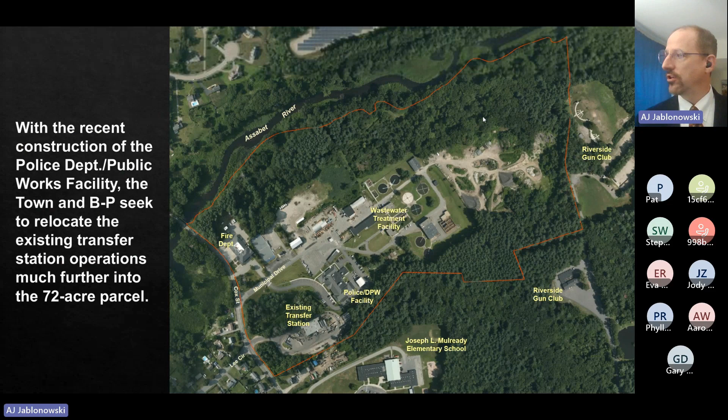The new site that you saw a slide below, the new area will cover, plus the roadway, will be just a bit over 5 acres of impervious surface, so newly paved or new buildings. The solid waste increase in capacity of more than 50 tons per day is another MEPA trigger. The other MEPA trigger is the fact that we do need a state permit. In this case, we need two from the Massachusetts Department of Environmental Protection—those are the authorization to construct and an authorization to operate a large solid waste handling facility.

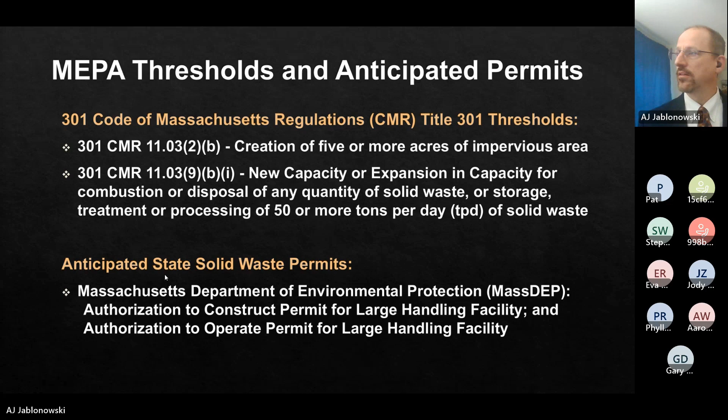The solid waste permitting: the existing transfer station will be replaced by a new one in the same parcel. The net effect is to increase the solid waste disposal capacity, and this is something we can talk about in some more detail later, by 500 tons per day. That changes from the existing permitted capacity of 350 to a proposed 850 tons per day.

The entire 72-acre parcel is site assigned. What that ends up meaning is that it's designated by the town and then officially by the state of Massachusetts as being a location for solid waste handling activities. We do need a minor modification to the site assignment. That will be sought from the Hudson Board of Health. Tied closely to that is the Mass DEP solid waste permits I mentioned before—authorization to construct, authorization to operate.

Once the new one is operating, the town and BP will terminate operation of the existing one, and the building will remain for DPW use. The permit for the existing transfer station will be retired and replaced by the permit for the new facility.

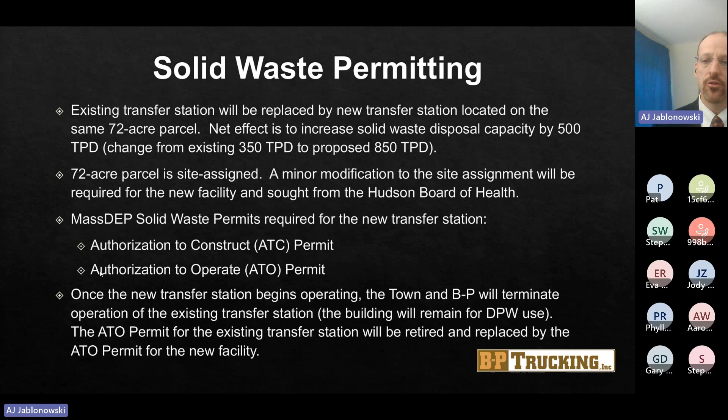So of the entire 72-acre larger site, the areas where there will be some work are in yellow here. That is removal of the existing transfer station, or retirement of that, construction of a new roadway to get to the back, and a new, more efficient facility in the back.

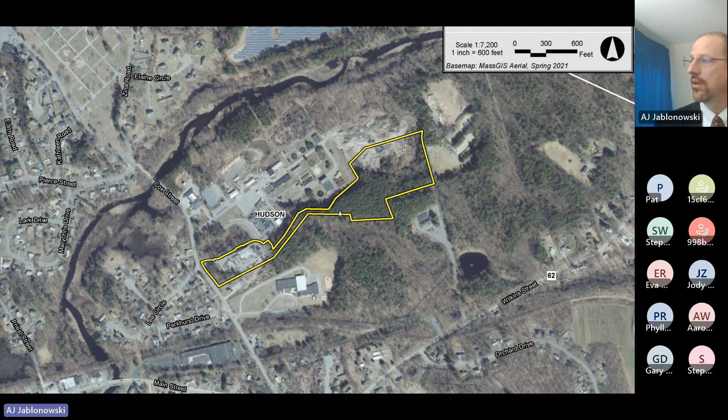There are two types of material that come through: municipal solid waste, that is household trash, and then construction and demolition waste, or C&D materials. That's what's coming from a construction project—so that's going to be wood, brick, asphalt shingles, sometimes drywall, the types of materials that would be coming from essentially taking a building down.

Those are handled separately, but the facility is permitted to handle both types of materials in any combination, with a total not to exceed 350 tons per day. There's no actual processing of the C&D material here—it's just transferred, taken from one set of trucks and sent out in another.

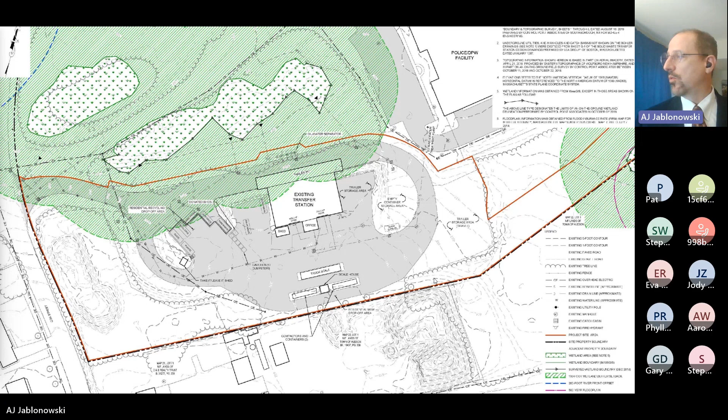Here is where the existing transfer station is right now. Coming in from Cox Street, here's the current entrance, the residential recycling drop-off area, donated bikes, shed, office, and truck scales—so that's what's going on in the front of the facility. What the limits of work now include is a roadway that will go out towards the back of the site.

A little bit more about the project: it will construct an approximately 53,000-square-foot transfer station building, a significantly larger structure than what we have now. The new building and related site development will be on about 13 acres—that's the yellow area you saw a few slides ago.

That's part of the entire 72 acres. The red circle there is the 72 acres of the town-owned property. This project brings an increase in capacity and an increase in some of the material handling capabilities.

This is some of what got discussed in the morning—the ability to do better separation of MSW, recyclables, and C&D, the ability now and in the future to separately collect individual items that aren't supposed to be in the trash stream, sorting and baling of recyclables within the facility, and some automation of sorting activities currently done by hand at the existing transfer station.

A lot of the questions we heard this morning have to do with how this will impact the residential customers of the town of Hudson. Hudson residents will continue to be allowed to visit the facility, drop off MSW, and drop off household recyclables in an exterior drop-off area. The overall process for the design on that is in development now.

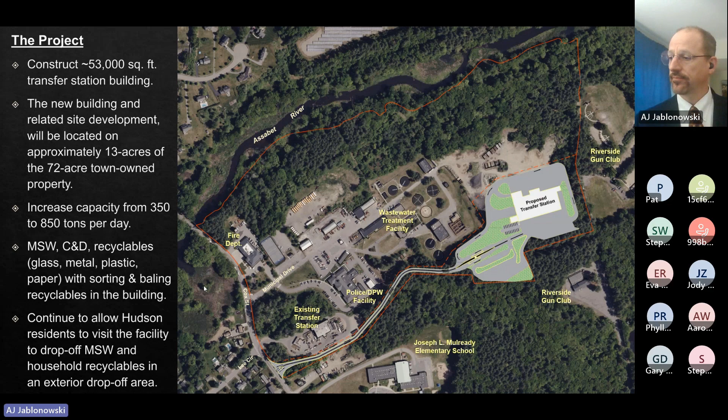Here's a bit more of a blow-up. We might be able to take this in more detail once we get to the questions session. But essentially, coming from the left here, coming in—anybody who knows the parcel—there is the parcel with the existing wastewater treatment facility.

We would be a bit to the south of that. Trucks and cars would be coming together to about this point, at which point the trucks go on the scales, and the residential customers bypass the scales and go straight to their drop-off areas, where the trucks will do more of a loop to work through to the back of the facility.

One moment. There we go.

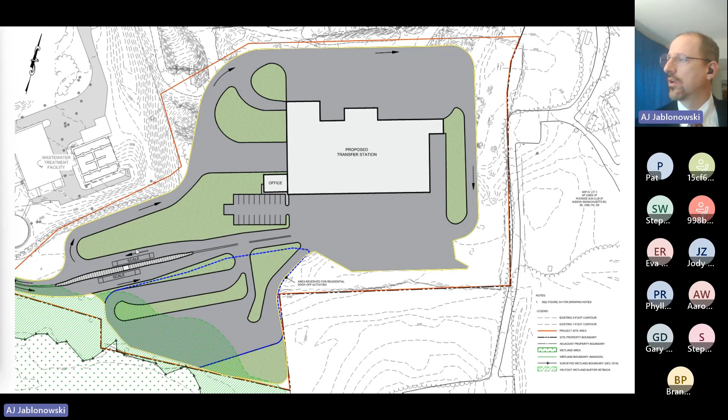Traffic routing—now here I'm not necessarily talking about at the facility. I'm talking about packer trucks. The transfer station concept is that trash trucks collecting household trash are typically packer trucks—the smaller trucks that come to people's houses, go through the residential streets, pick up the trash, and come to this current facility, and would come to this newer, more modern facility.

Those come in, the materials get sorted, packed more tightly and efficiently, and sent out on tractor trailers, which mostly go out to 495 to reach a final endpoint somewhere west of here.

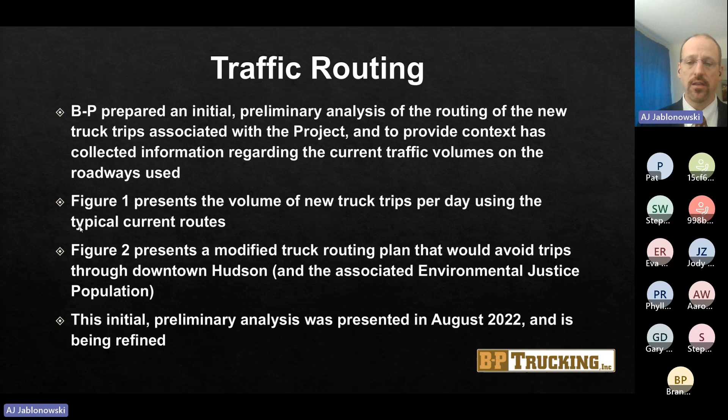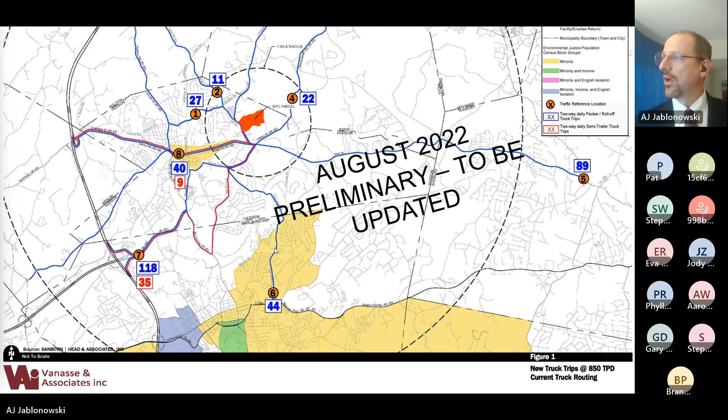The proposed design, which we're actively working on, will attempt to control how traffic is moving through town, with one of the goals, based on things we've heard and based on DePalos and others' understanding of the town, being to keep truck traffic out of that downtown area.

How much control is a topic of discussion, but generally the tractor trailers that are leaving are under B-P's control and will be following a prescribed route.

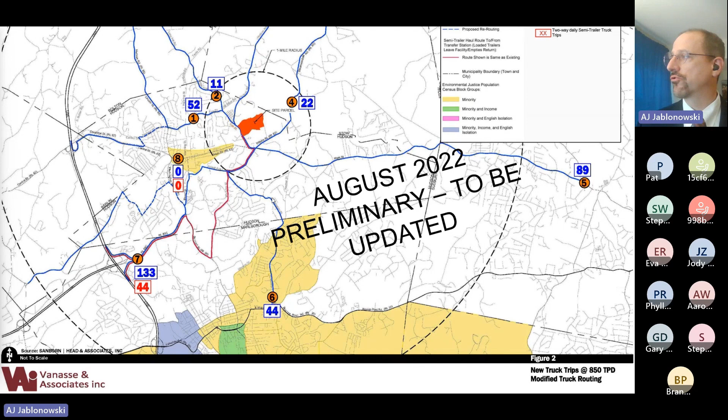Where is the project on schedule? That was a question from a lot of folks. There have been discussions at the town level that others on the call may be able to provide more detail about than I can. I'm more involved in the environmental permitting side.

That begins with the MEPA soup-to-nuts environmental review process, which started in May of last year. The first substantive filing is the Environmental Notification Form, available now, which got filed in August of 2022. We had an in-person meeting at the police station and an online public session, similar in structure to this one, on August 22nd of 2022.

What MEPA does at that point is take that first filing, the ENF, which is a notification form describing overall what the project size is and what the project proposes to do. From that first review process, we get an ENF certificate from the MEPA office, which is essentially our to-do list of what should get analyzed further as part of a formal environmental impact report.